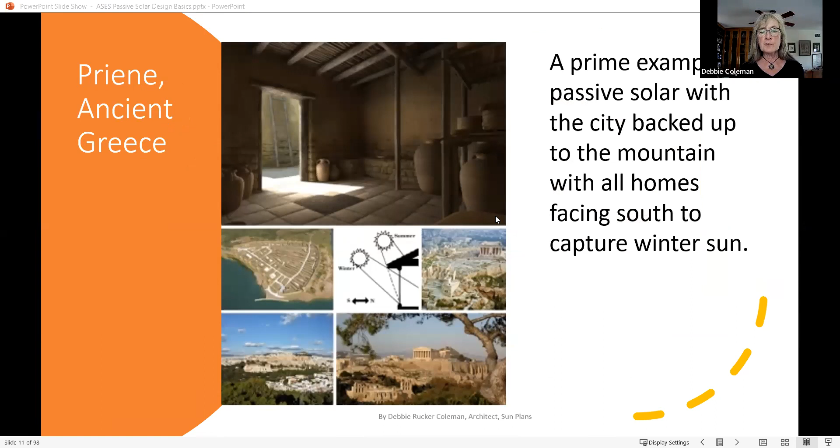Historically, passive solar is not new. The Native American Pueblo Indians built hundreds of structures in the south-facing cliffs of the Southwest US. In ancient Greece, there are examples with the cities backed up to the mountains with all the homes facing south to capture the winter sun.

In the United States, George Keck was the first architect to pioneer passive solar house design in 1933. He built a lot of houses with a lot of glass, but they overheated, so he played around with that. But he, in relationship with the developer Howard Sloan, built some passive solar homes and learned and experimented with those. The solar house movement started, I guess, in the 1940s, and Frank Lloyd Wright also started incorporating passive solar design around then.

So passive solar equals heating by the sun. There's no active moving parts. There doesn't have to be any moving parts for passive solar to work.

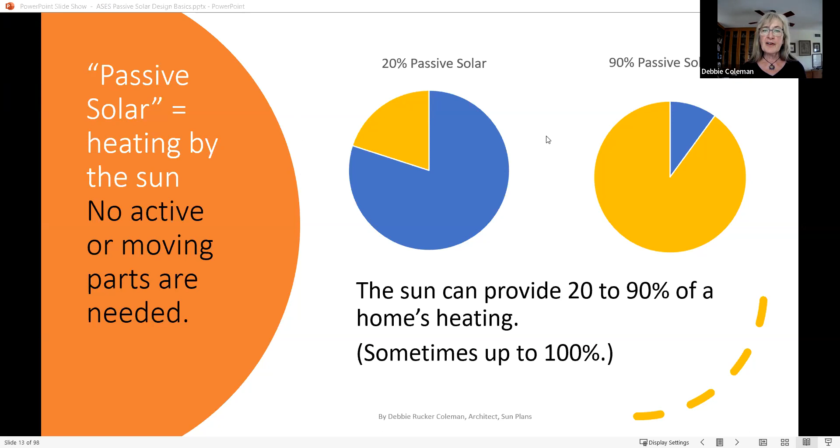It's really easy to design a home where 20% can be heated by the sun. It's a lot harder, but it can be done up to 90%. And there's some arguments that the sun can also provide 100%, which is not out of the question.

Traditionally in the United States, about half of our energy consumption is for heating and cooling. Obviously, that's going to vary a lot from different parts of the country. If you're in the north, the cooling is only a small part, the heating is a huge part. If you're in the south, it's reversed.

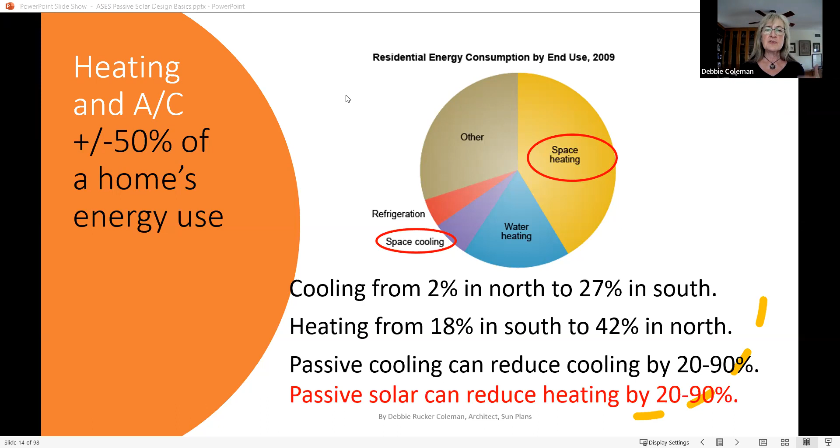In summary, the sun can provide between 20 to 90% of the heating, but then passive solar's sister, passive cooling - a lot of the strategies are the same. You can also passively cool a house 20 to 90%, which means you're cutting your air conditioning 20 to 90% with some of the compatible cooling strategies.

So overall, I think the goal is passive survivability. That term can be attributed to building science expert Alex Wilson, who defines it as maintaining livable conditions in the event of extended loss of power or interruptions in heating fuel.

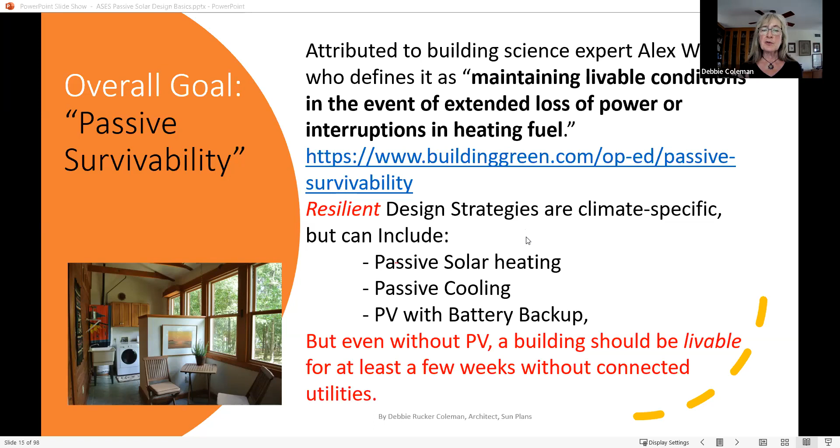You hear about the word resilient a lot - resilient design strategies. They're climate specific, but they can include passive solar heating, passive cooling, and PV with battery backup. But in my opinion, even without PV, a building, a home specifically, should be livable for at least a few weeks without connected utilities. And by connected, I mean even connected to your battery backup if that fails.

So we have the active solar, which is really easy to see. It's usually on the roof or on the ground, no doubt - that's what it is. Some people like it, some people don't. The passive features are a little more subtle. They have to do with orientation, the windows, and the overhangs. And they must be designed for initially - they're really hard to add on later.

Basically, you're arranging parts that are already in a house, just in a different configuration than you may be used to.

So passive solar, along with passive cooling, more insulation, less air leakage, and smaller HVAC designs - all of that combined means that we need less PV to power the home, to power its auxiliary backup heating, and just to condition the home in general.

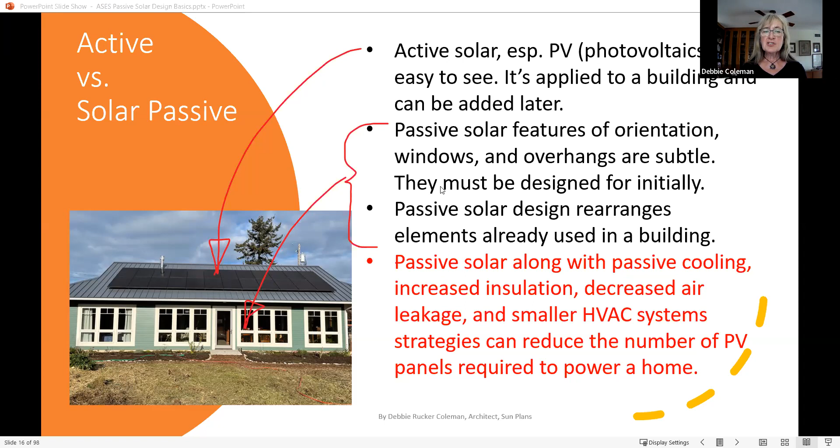There's a lot of attention given to all the energy we can get from the south-facing roof. But let's not forget that the wall also faces south. In the US, looking at this south-facing wall, you can see it receives almost the same amount of energy per square foot or per square meter as the roof does.

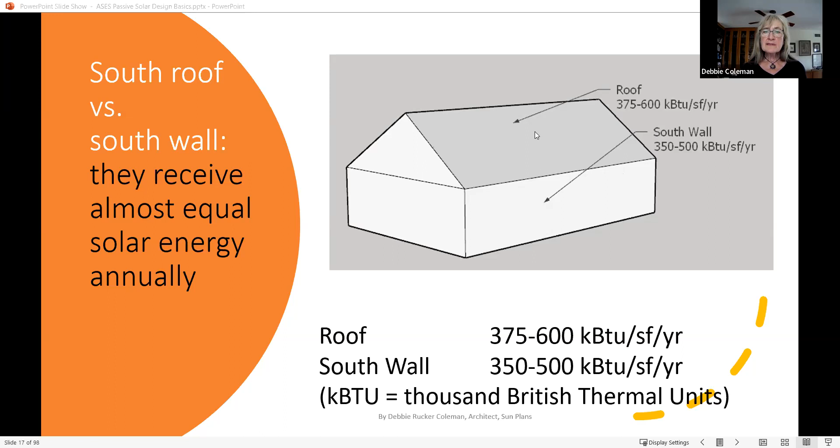So we have the active PV panels. I won't go over that a lot because of this ASES group, but obviously when you add the active solar to it, the house can be 100% powered by the sun, net zero energy, and all the different appliances that use the electricity.

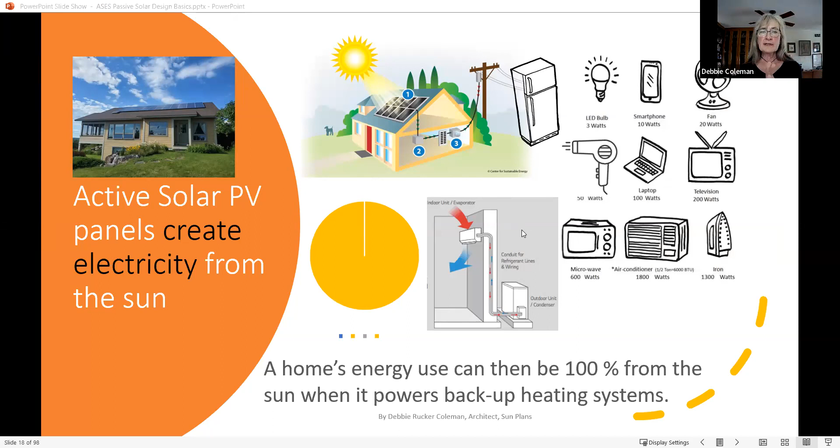From the passive heating standpoint, it's the mechanical system. Here's the mini split heat pump. That's what we're looking to power with the PV panels from the home conditioning standpoint.

Any extra solar that you generate from the PV can power the cars. Panels put on the roof can also heat water to go in the house, although now there's a trend more to use that PV to power your heat pump water heater. But anyway, water can be heated by the sun through panels on a roof.

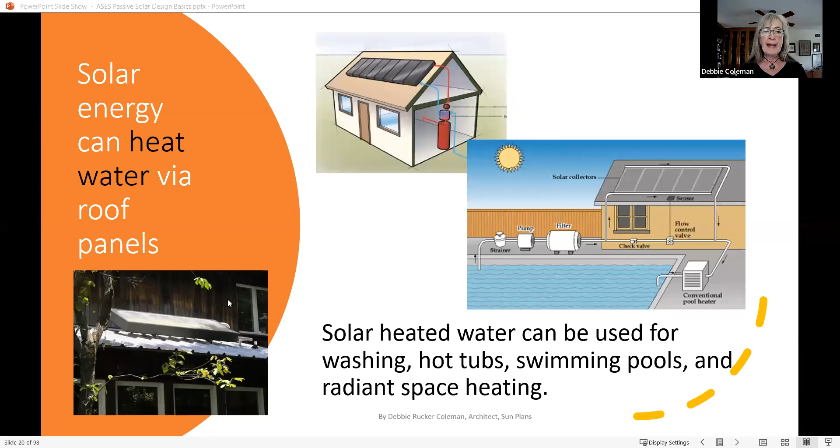This was a passive solar hot water heater system that I had.

And it can purify drinking water. So this simple system here, this is probably 2 feet by 3 feet, could probably distill about 1 gallon of water a day, which is enough for 2 people. So no need to buy bottled water.

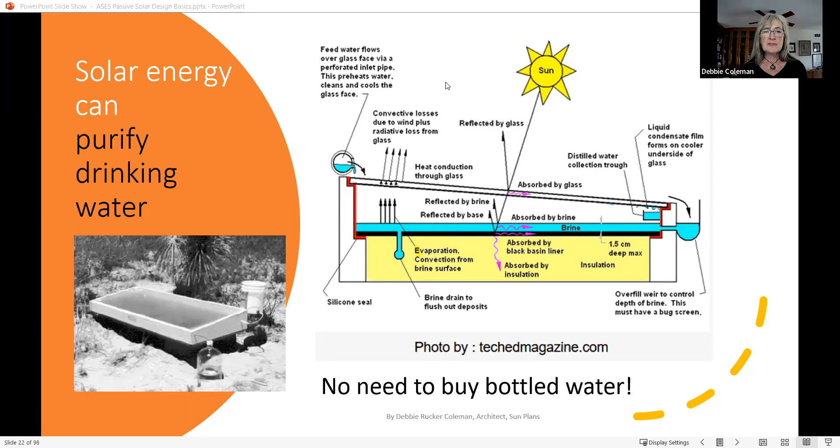And then one of my favorites is that solar energy can dry clothes. I like it because it's so basic. Less need to run the dryer.

Okay, so some of the prerequisites of passive solar house design - you don't want to just go putting the passive features on an energy inefficient building. So the same good design principles apply to a passive solar house that would to any other house. You want the well-insulated roof, walls, floors, window. You want a tight house. You want a right-sized heating and air conditioning system designed for the worst case scenario when the sun might not be out. That's a code requirement.

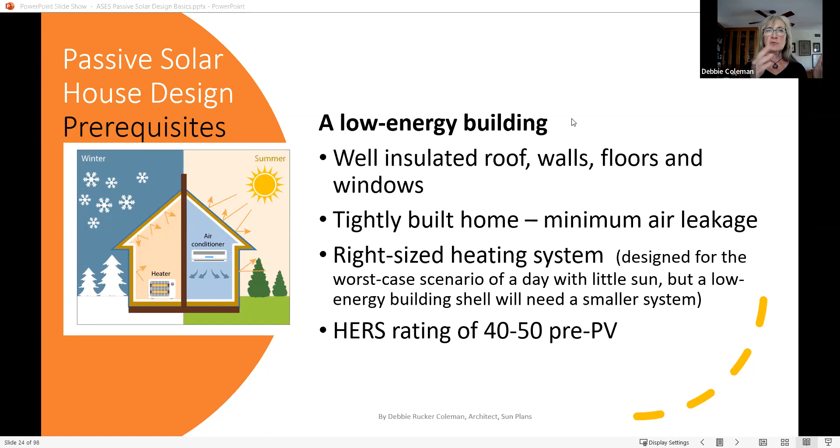And in terms of HERS rating, which you hear a lot about, I think aiming for around 40 is a really good goal. And then when you add your PV, it's easy to get it down to 0 to 10. If you're going to be charging your car, then you can go below 0.

Thicker insulation - not only does it keep in more heat, it keeps out more heat. So during the hot times of the year, that same insulation is working just in reverse. And beyond code minimum is a typical recommendation.

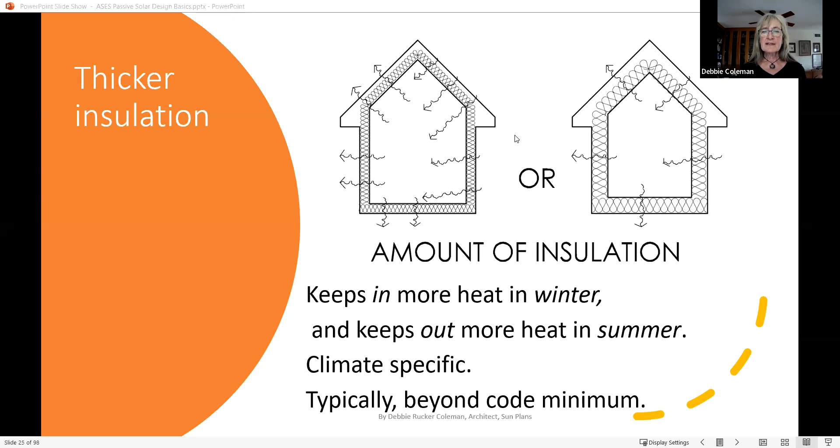A well-sealed envelope, whether it's caulking or house wraps or the combination - a well-sealed house will not only keep out the leaking hot air or cold air, it keeps out the humidity and it keeps out dust and bugs.

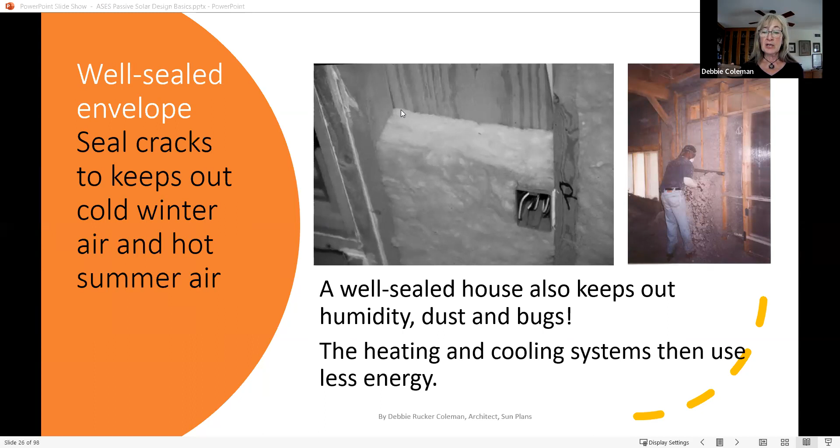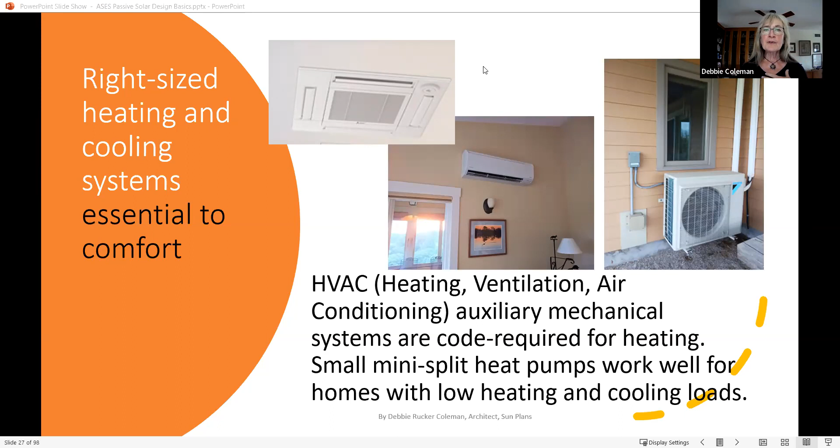The right sized heating and cooling system, that's essential to the comfort of your home. That is the backup to passive solar. There's going to be times of the year with these fixed systems and our huge climate change that we see, from extremes of 70 degrees from one week to the next, you can't design a fixed system to meet all needs. So you do rely on your heating and cooling backup system to help you through some of those times. But a right size one is important to the comfort inside the house.

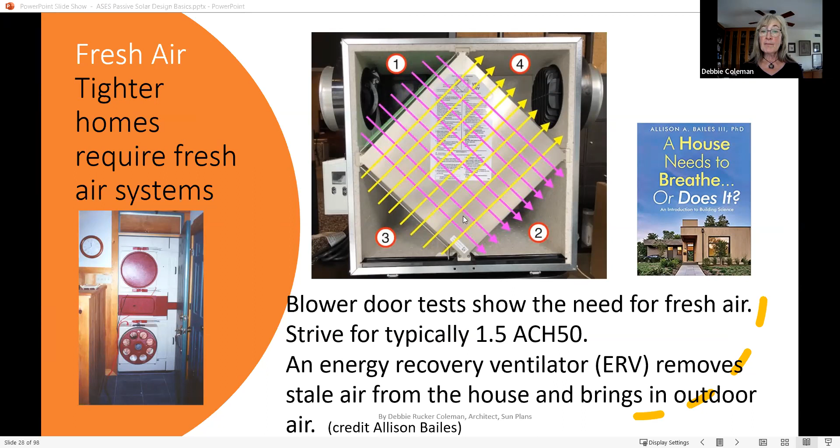You want to introduce fresh air. There's simple passive ways to do it. There's mechanical - the trend is more to add an energy recovery ventilator that takes in the fresh air and exchanges it with the heat and puts it into the house. Blower door testing to see how much of that fresh air you need is important.

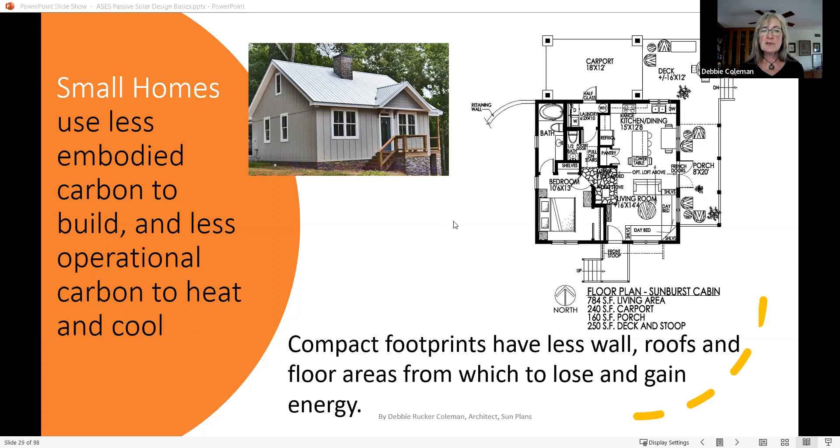And let's not forget the basics. Small homes use less embodied carbon energy to build in the first place, and they're less to operate, to heat and cool. So when people say, what's the most energy efficient home? I'll usually start with, well, the smallest that you can live in. And those compact shapes - there's less wall area, roof area, and floor area in which to lose or gain heat through. I really like a compact footprint for, say, a slightly bigger house that might have 3 bedrooms.

Rather than put those 2 bedrooms up, why not put them down in the south-facing daylight basement? You won't even be able to tell that you're in a basement. And when those homes, those spaces are nestled into the earth, there's a lot less heat loss and heat gain because the below grade temperatures are much more stable, at 40 to 76, than outdoor temperatures, which have a much wider temperature swing.

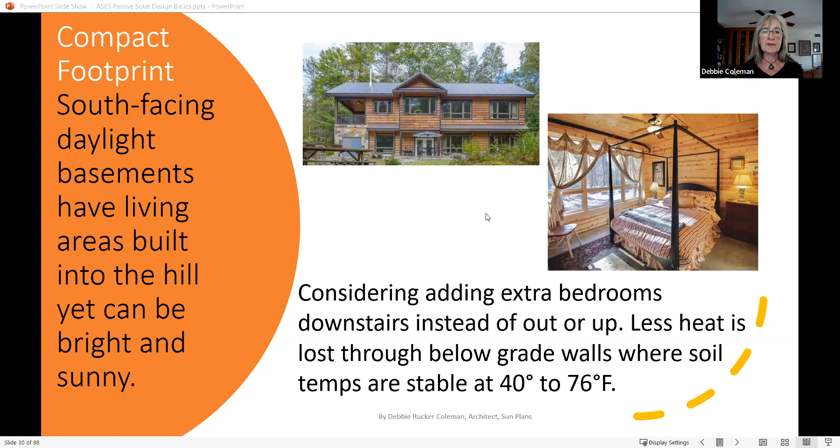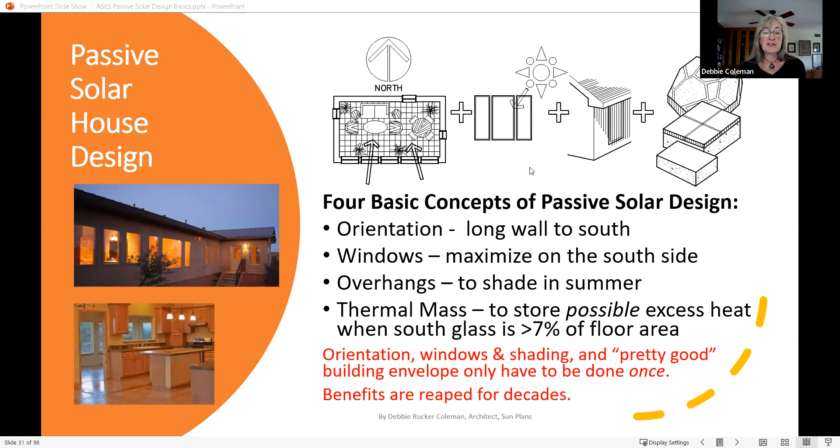So breaking down the 4 basics, we have orientation, the long wall facing south. We have windows, maximizing those on the south side. Overhangs to shade those south windows in summer. And then the thermal mass, that's to store possible excess heat if you have more than 7% of the floor area in south glass. So you only have to integrate these features one time in the design and construction, and then you'll take advantage of the benefits for years.

I mentioned the south facing glass. It's good to know where that is, especially because if it's not facing that way, you can cause some overheating in morning or afternoon. So true north and magnetic north are not the same, which I'm sure many of you know, but there's a huge variation.

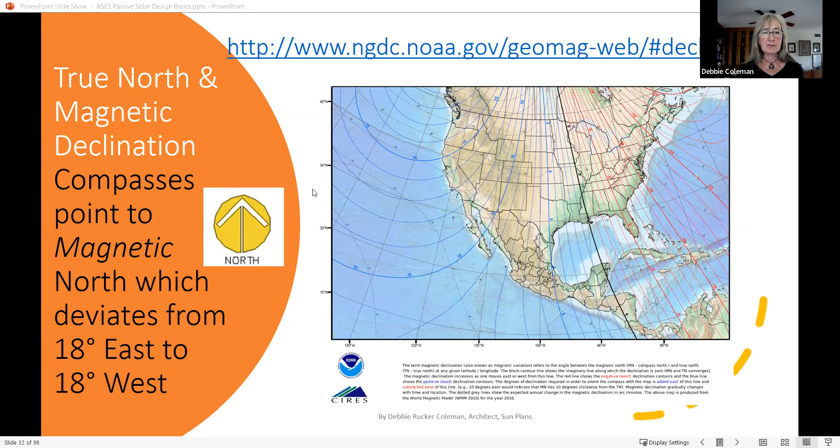If you look in the Pacific Northwest, it's going to deviate up to 18 degrees to the east. You move over here to the northeast, and it's going to deviate 18 degrees the other way. So that's 36 degrees of variation just in the United States alone. So you really need to get that right. Where is true north and therefore true south?

One of the reasons we need to do this is just to make sure that the windows are in the right place. The sun's movement - I apologize if this is just so basic, but it's really important.

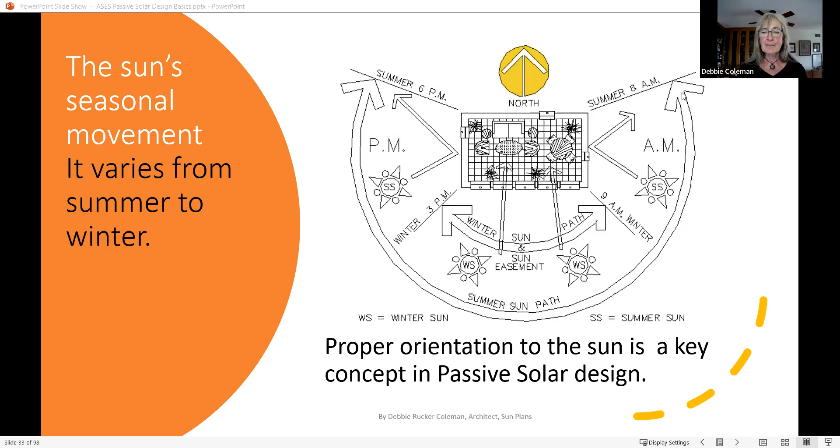So the sun does not move the same in summer as it does in winter. In summer, it has a great big arc and covers a lot of the building. In winter, it has this little bitty path. In summer, the sun is going to be almost overhead at noon.

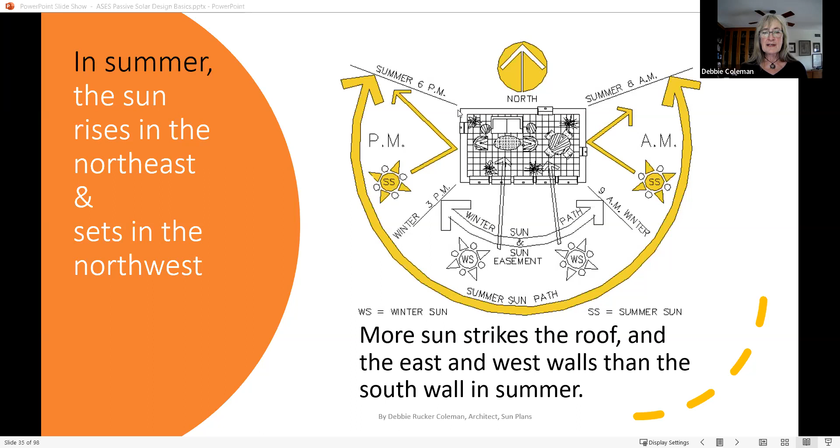And it's going to rise in the northeast. It's going to strike the east wall, then it's going to move around to the south, where because it's so high, it's really not hitting these south walls. And then it's going to set in the northwest, where during that afternoon, it's pounding on the west wall.

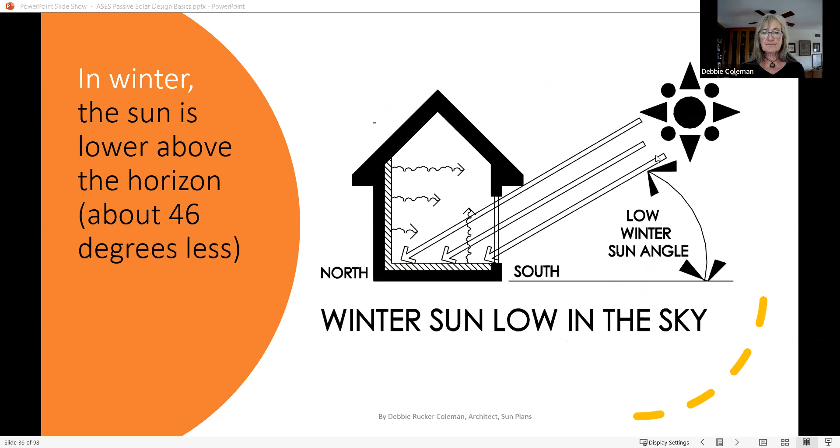In winter, it's going to be lower in the sky, about 46 degrees, as it moves from the 2 tropics of the earth. And it's not going to cover as much of the building. It's going to rise in the southeast most of the time, and it's going to be striking the south wall of the house.

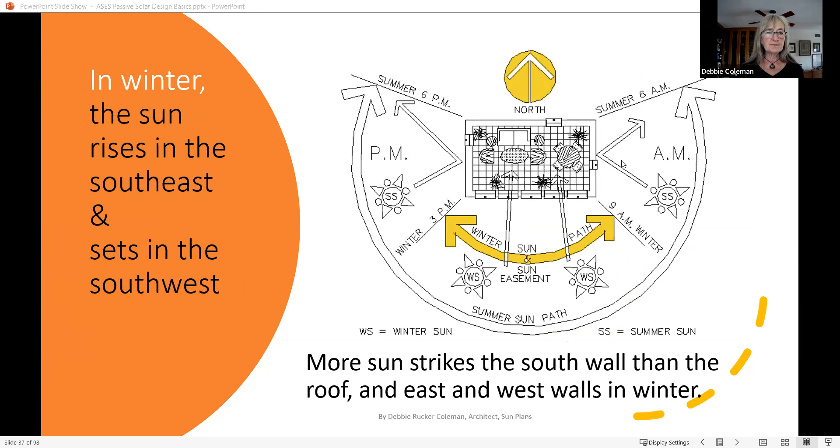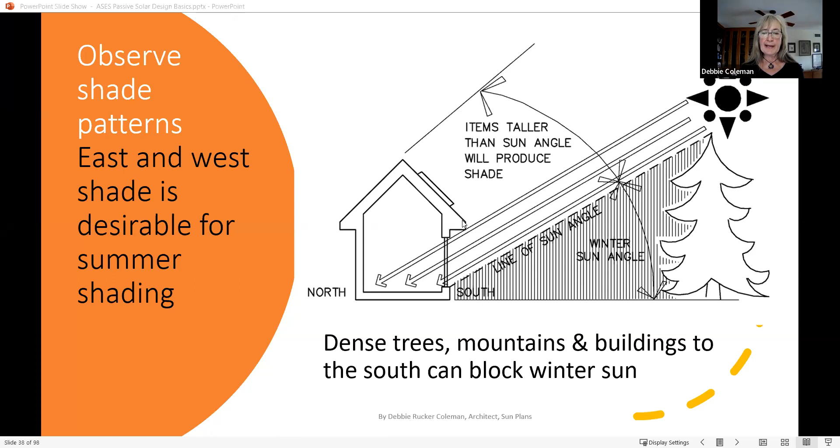Very little sun is going to hit the east and west. When you're out at your site before you build, you want to pay attention to shade patterns. You don't want to place the house in a shade pattern unless it's shade to the east and west. I really like this solar pathfinder tool that I think probably most PV installers have, where you can go out any time of day and any time of the year, and graph your shade patterns on the site. I think it's a really good tool to use when you're siting a house, especially if it's a small site and you're not sure how tall those trees are and what kind of shade they'll provide.

Building shape really affects the amount of south glass, so you want to think about that early on. Some building shapes allow for more south facing windows than others do.

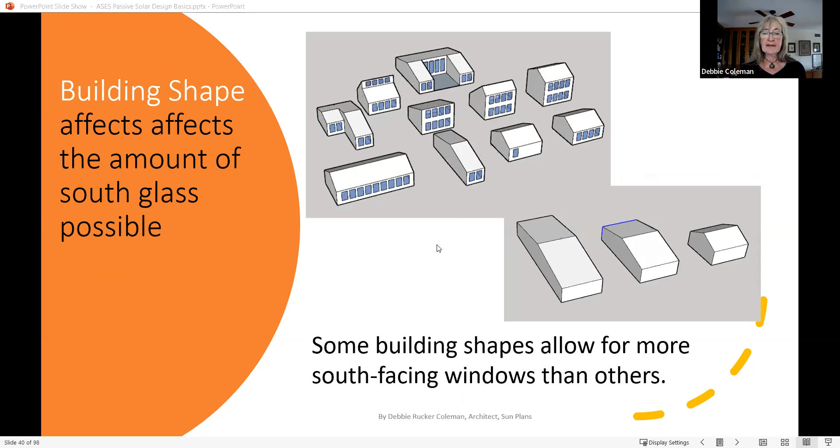So again, the south wall receives more hours of direct sunlight in winter than the east wall. Looking at the east wall, it might get 3 hours of morning sun in the winter, 3 hours of afternoon sun, and that's going to be sun that's low and not so strong to start with. But 6 hours in the middle of the day, on average, you will have passive solar gain. So that's kind of the basics of why most of the windows should be there.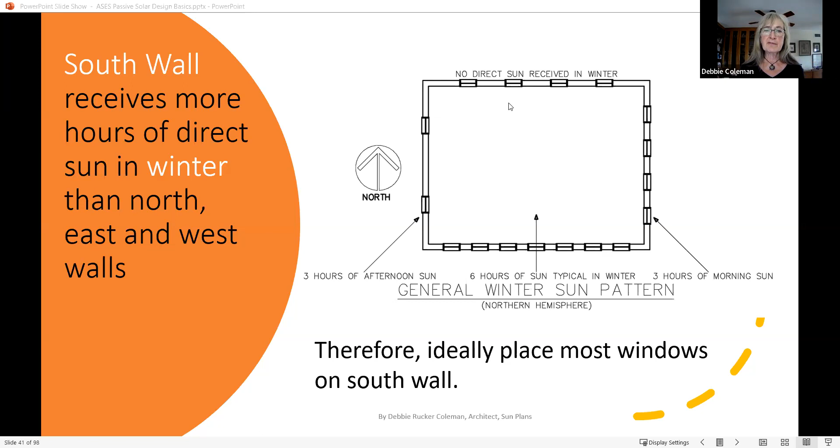You can put them on the north, and obviously I advocate for that in terms of views and just letting in the natural light, balancing light within a room, but there's not going to be any net solar gain coming from the north windows. So rules of thumb - how much for the different windows? These come out of some guidelines I'll reference earlier that came out of some NREL work. The west glass, a maximum of 2% of the floor area, since there's so much heat that comes in the afternoon.

North glass, I actually prefer a little bit less—I really like to right size and right place the windows based on the views, but a maximum of 4%. For east-facing glass, also 4%, though it's a little more forgiving, since sometimes we design houses to take advantage of that morning east gain, so there's a bit more flexibility with the amount of glass there.

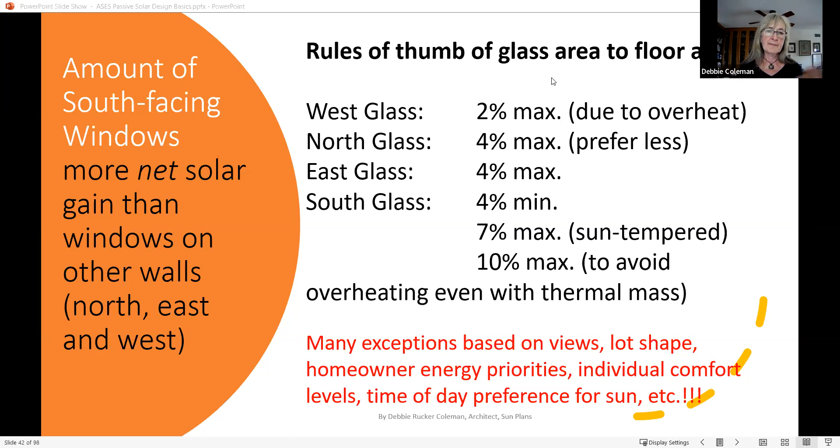For south glass, I recommend you strive for at least 4% as a bare minimum. 7% should be easy to do, and up to 10% can start to get challenging with your room layout, structural issues, and overheating. But there are all kinds of exceptions based on the views, the lot shape, homeowners' energy priorities, individual comfort, and their time-of-day preference for the sun—whether they're morning or afternoon people, etc.

Here's a south-facing window example—again, emphasizing this is for the northern hemisphere. If the south glass equals 4 to 7% of the floor area, that's often called sun tempering, and you'd need no additional thermal mass for that space to maintain reasonably comfortable temperatures. If you go above 7 up to 10%, you're going to start adding thermal mass. 8% is a really achievable number—a good balance that's a bit more without being excessive, doesn't cause structural issues, and usually isn't too much sun into a room.

Let's run through an example: this 30 by 40 foot house I drew has 7 windows that are 3 by 5 feet. A 3 by 5 window with a 2-inch frame would have 12.5 square feet of glass, since we're really talking about glass area, not window area. With 7 windows, that's about 87 square feet of south glass. Divide that by 1,200 square feet of floor area, and you get 7% of the floor area in south glass. When you look at that wall, you'd say, yeah, that looks like there's a lot of windows there.

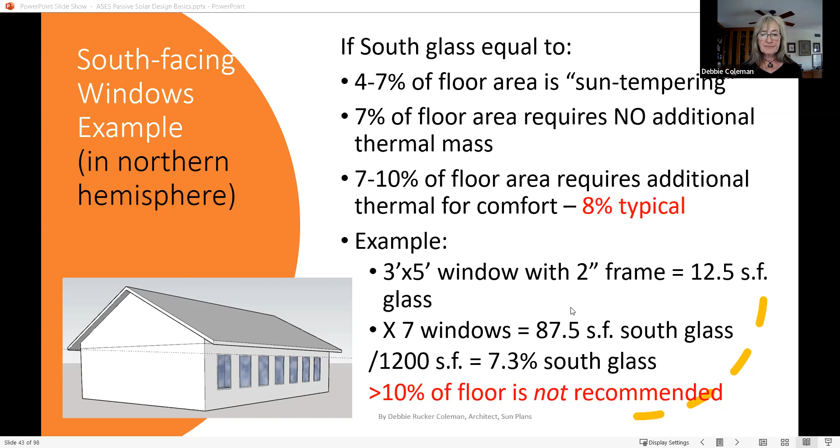And again, I've been talking about south glass versus south windows. An important window feature is the solar heat gain coefficient. A glass spec of, say, 0.68, which you see in a lot of passive solar friendly windows, will let in 68% of the sun's heat through the glass. However, that same glass, once put in a window frame, arrives at the job site with a solar heat gain coefficient sticker that's much lower. It's easy to think, oh my gosh, they messed up the window order—but the window is rated as a whole, meaning the average of the frame and the glass, so that number is going to be a lot lower. That's just the way the National Fenestration Rating Council rates windows.

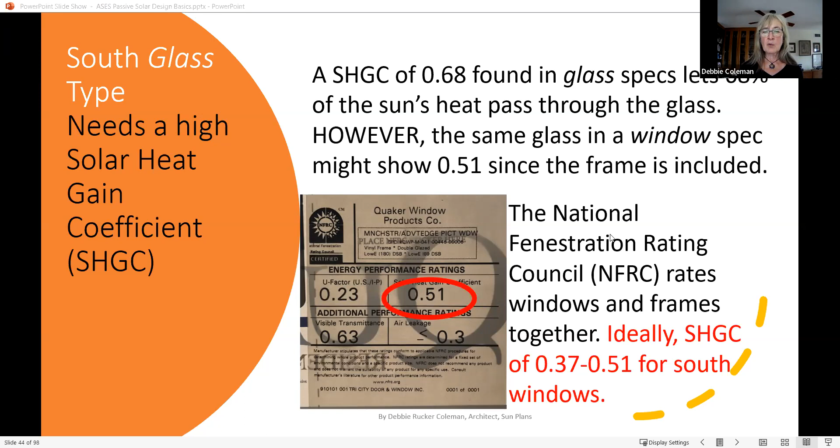So based on that number, I recommend you strive for a 0.37 minimum for your south-facing windows. And it's hard to find a number higher than 0.51 in a window overall.

Another feature of the glass is its insulating value, often referred to as a U-value—that's what you'll see on the sticker. The U-value is the inverse of the R-value, so 0.23 is R 4.3. Of course, a recommendation is to use better triple pane if your budget allows, or make it fit in your budget, because you only have a chance to do this right once, and hopefully you won't have to replace those windows for a really long time.

If you want a higher R-value, you can add insulated curtains to the inside to use on cold winter nights. Some cellular shades will let in light, so those can even be used on cloudy but still sunny days to let light into the house.

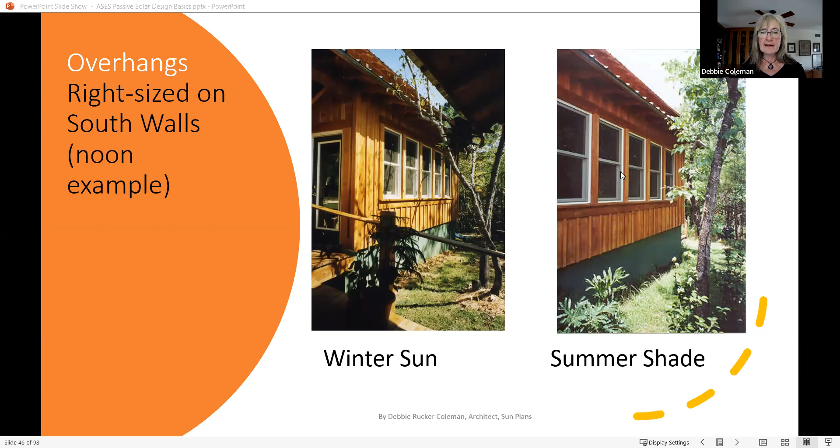Overhangs—we'll talk more about sizing later, but in summary, a right-sized one will have all windows in sun at noon in winter, and all in shade in summer. It's amazing how well a 2-foot overhang works as a general rule for a conventional house design, plus the 6 inches of gutter I like to recommend. Here's another example showing the shade line in winter, and then full shade on these windows with this attached overhang in summer.

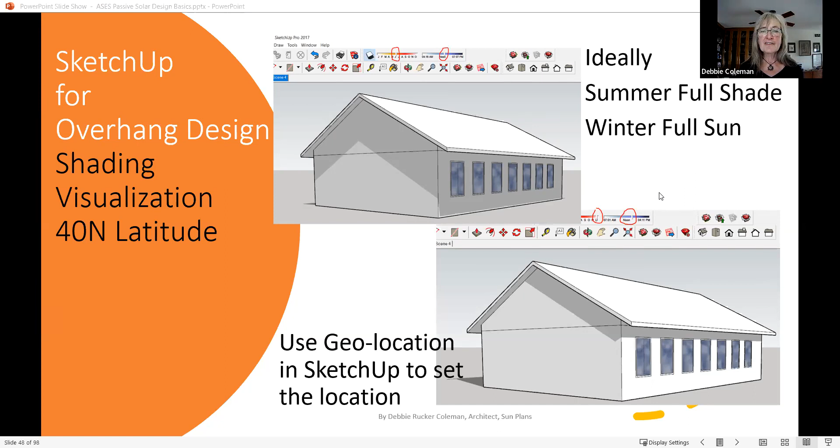SketchUp, for anybody that uses that free software, is really fun for overhang design. Here's an example I plugged in, 40 degrees north latitude. There's a setting under tools where you add the geolocation of where you are, and then the shade patterns you see will be the actual sun movements for that particular day. You can see as it moves from 9 a.m. to 3 p.m., the times when you really want the sun, watching it move across the building. You could do a little animation of it. I think it's something clients like to see.

Still talking about shading: east and west windows, porches. If you have to have a porch, that's a great place to put it. Obviously, if you put a porch on the south side, it's going to block your solar gain, but put the front porch, back porch, or any other kind of porch on the east and west, because it's going to shade those windows and shade the wall. If you had trees there, that would probably be the first choice for shading, but that's not always possible. Definitely don't cut your east and west trees down any more than you have to until you've lived in the house, and I use the same thinking with the south ones. When in doubt, you can always take a tree down later, but for a 30 or 40 foot tall tree, I'd rather err on the cautious side. If it's not going to hurt your house when you take it down, leave it up for a little while—it might not provide as much shade as you think it will.

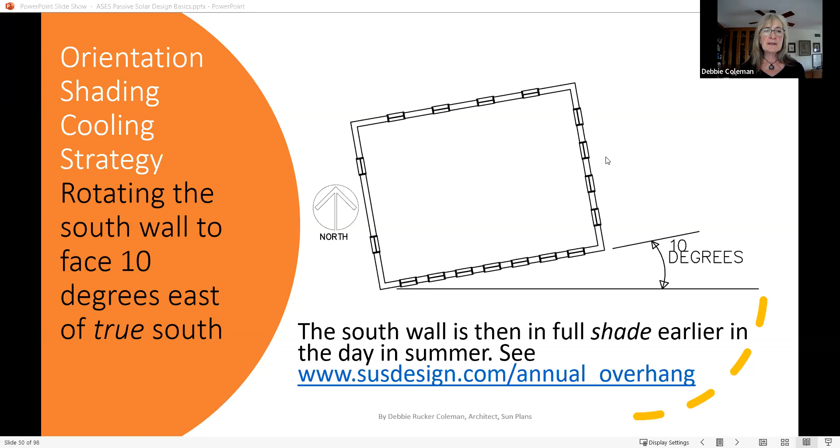This is one of my favorite shading strategies, and it has to do with the building's orientation in plan. It is amazing, and you can see this better when you model it in SketchUp, or any of the other more complex tools. When you orient it just 10 degrees to the east, you can see that south wall becomes shaded much earlier on a summer day than if it was facing due south. And the winter heating penalties are minimal—the calculations show maybe 3%. So I really like doing this in warmer climates, or if a client just has a preference for more morning sun.

Okay, so moving into thermal mass, let's talk about the materials and the quantity. For materials, I like to work with ones that are already going into a house, and I think the most common is a 4-inch concrete slab, whether it's the main house with one of the cold climate foundations, or whether it's a daylight basement. I really like concrete. Then you have brick, that's great for veneers on walls, stone, tile, sheetrock. All of those are going to provide thermal mass.

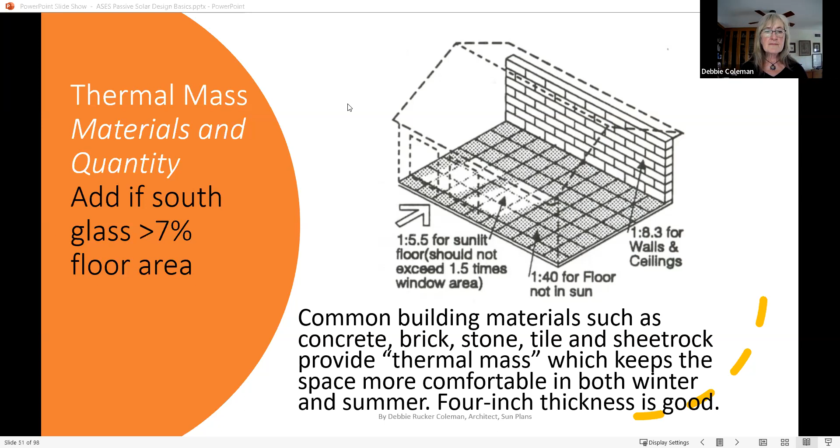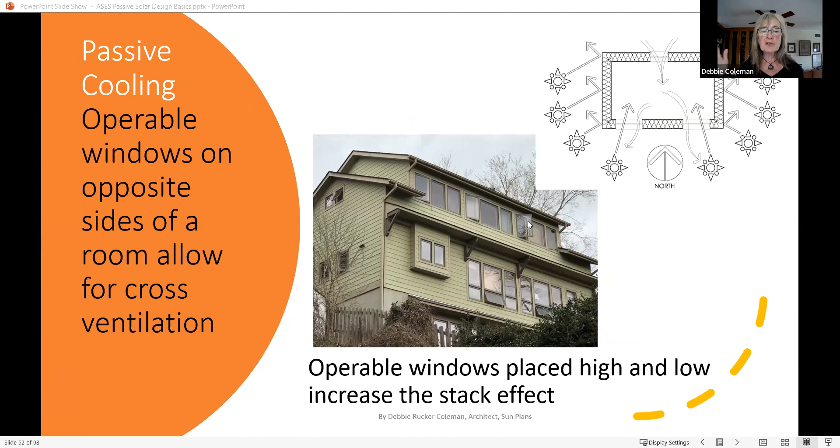For passive cooling, just going into that a little bit: operable windows on opposite sides of a room—it's amazing how that can help cool a space. And then there's high and low windows. A lot of times I like to design in an awning window down low and a casement window up above. With both of those open, you're creating a stack effect, getting vertical airflow that helps with cooling.

Not really passive, but a simple active air distribution. A lot of times I'll specify an inline fan with, say, a 6-inch duct that goes from the high part of a house, if it's more than one story, and ducts down to the basement to help circulate the air. It can be a small inline fan.

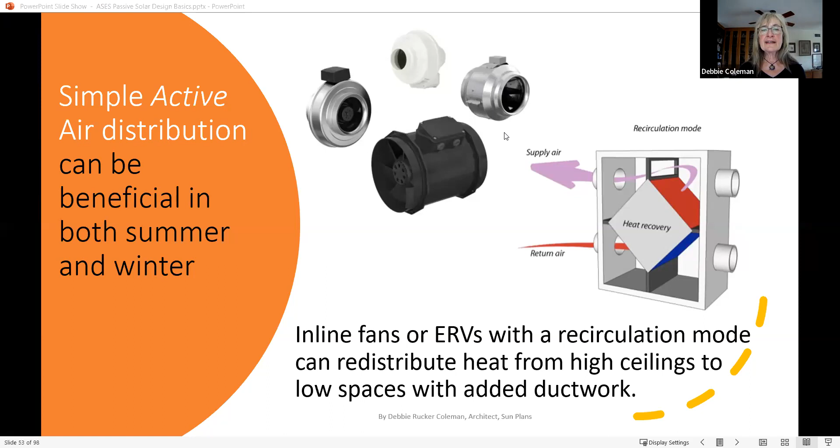Some of the ERVs and HRVs can be run in a recirculation mode, so when you're not bringing air in from the outside, you can be circulating what's already in the house. I like the idea of circulating it down to a mechanical room, say where there might be an air-to-air heat pump or air-to-water heat pump, so that it can also utilize that hot air.

So passive solar is really part of the holistic design process. Sometimes it's easy to think, oh, it's the whole thing, but when you're dealing with an owner, there's so many other needs that they have besides the energy and the passive solar features. There's their wish list, which could entail endless types of things.

There's the siting. Where does the road come in? How does the ground slope? What's their climate like? What's their ideal floor plan function? What construction materials does the builder like to work with? Structural issues, if they're in a high wind or high seismic area. Exterior design styles, what does the client ideally want? Mechanical systems - there's a lot of preferences for those, preconceived before they start talking with us or HVAC consultants.

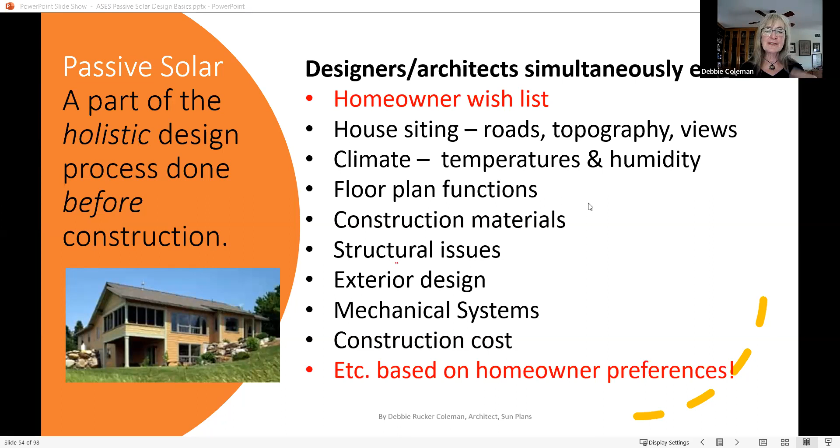And then there's the construction cost. Actually, I probably should have put that at the top. But anyway, I'm just saying all the different things you're going to evaluate - passive solar is just one more of them.

The climate specific design, I already mentioned that, but just more things to think about. You might design a house differently at one latitude, or at a different elevation above sea level for the same latitude. The wind speed and direction, especially in relation to passive cooling, or where not to put an outdoor living area. Are the occupants cold natured or hot natured? That's actually a fairly large one.

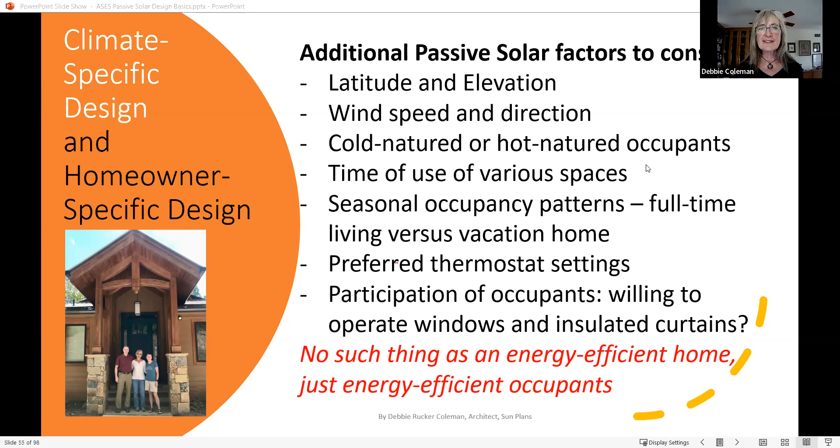Time of day of the different spaces - are they using certain rooms in the morning, the afternoon? Seasonal occupancies - if they're living in the house full time, and are there to be active people in a passive house, that's one thing. If it's just a vacation mode, then you might do some other strategies. The preferred thermostat settings, and are they willing to operate windows and curtains? Are the homeowners willing to be active people in this passive house? And I know you've all heard, there's no such thing as an energy efficient home, just energy efficient occupants.

Okay, well, I wish Christopher was here to do his part of the presentation, but he had other things that came up he had to do today. So I'm just going to go through some of his tools, which I've been using for about 20 years.

I think they are really cool, user-friendly design tools to help with passive solar, and more than passive solar, other aspects of solar energy. If you go to his website, there's a variety of design tools that he has, and I'm just going to go over two very briefly: the overhang analysis and the window heat gain. That's all we have time for today.

The inputs: you input your latitude, the time of day you want, the time of year you want to see the results, where the window faces, the window width, the window height, the overhang width, the overhang depth, and don't forget to include the gutter if that's going to be added, and the height above the window. I think that one's really important because it's so easy to mess that up. A lot of times that's hard to estimate until you get into the construction detailed drawings, but just pointing it out - the distance really between the top of the window and the bottom of the overhang, measured vertically.

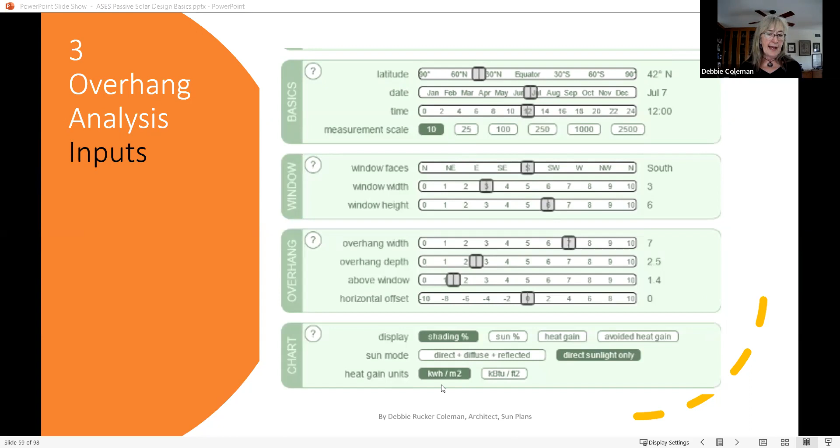And then in terms of outputs, you can choose: do you want to see the part that's shaded? Do you want to see how much sun? Do you want direct sunlight only? Do you want kilowatt hours per square meter? Do you want BTUs per square foot? But the output, I really like this.

Here's the times of day, here's the months of the year, and in this one we're showing the shading option. So you can see 100% in June, right in the middle of the day - that's usually a minimum. And then how far out the shading went to other parts would be climate preferences, homeowner preferences. But the bottom line is the tool makes it really easy to see where you're getting 100% shade and where you're getting 0% shade - in January, in this case, between 8 and 4.

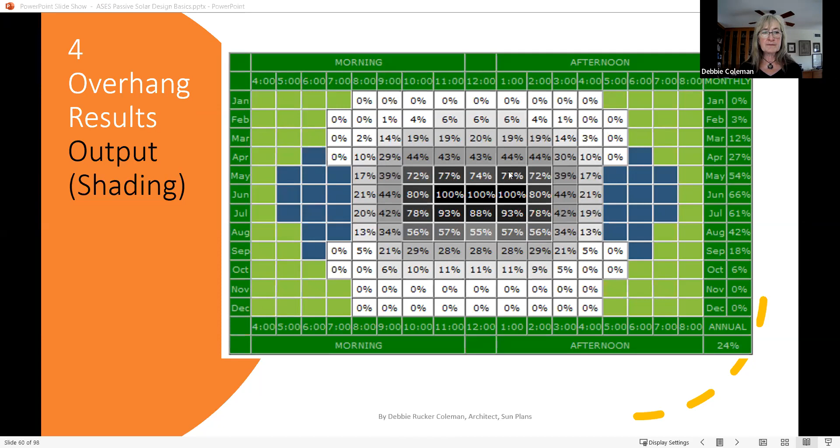You can look up your latitude by your zip code, or you can pick a city. I believe there are about 250 cities, and typically each state will have 3 to 6 to choose from. So I think it's okay to do that.

I don't think you need to get into the extra details. In terms of inputs, once you pick a city, you don't have to enter the percent of clear sky and sunshine every day, you can just forget that part. If you're picking the city first, this is already entered for you.

Same thing with ground surface. I might pick higher if I say, oh, where's snow, let's see how much extra we get from reflective snow. But typically, from a basic design standpoint, I'm leaving those untouched.

The window part, however, I think is a lot more important. There you can pick the type of window, which is going to equate to some of the solar heat gain coefficients, or you can enter the solar heat gain coefficient yourself.

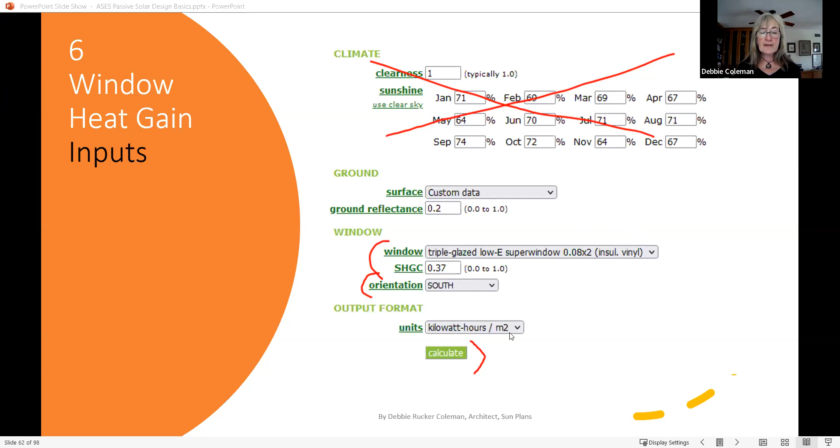Then after you click calculate, this is what you see. You can see the amount, and the lighter areas are showing higher amounts of passive solar gain during those months and that time of day.

Down here at the bottom, you can say, email me these inputs and outputs. Then from there, you can enter them into an Excel sheet and add your own other shading strategies and other things that you'd like to do.

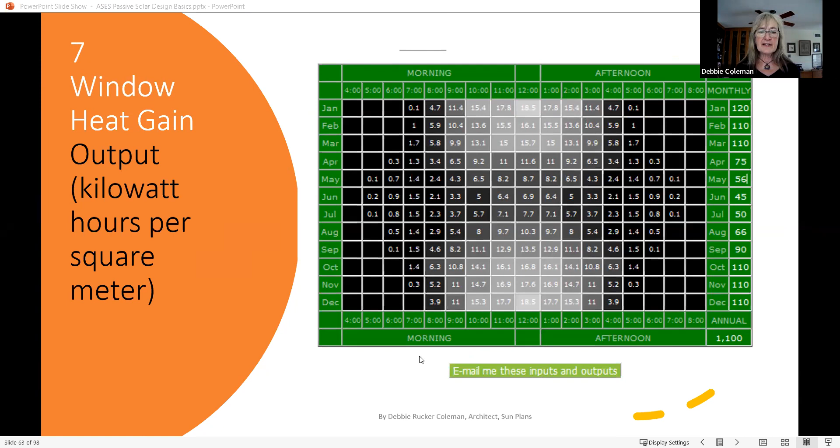This is my favorite, and it's actually part of the overhang, but this specific link, if you want to take a screenshot or make a note of that, it's actually a different version that's harder to find on his website.

How I will use this, just to show you, I'll draw - this is kind of at this construction drawing stage. I'm going back, double checking, and I'll look at the wall detail, and this is drawn to scale. So I will scale things right off the scale elements, right off the wall detail.

I like this part over here on the upper right, because your overhang depth, you enter that in, the spacing, the distance between the overhang and the top of the window, and then your window height.

And then usually I'm looking for direct sun only from an evaluation standpoint. I want to see the percent of sun maybe at this point rather than the percent of shade. So reverse from the other diagram that I showed, when it's in shade, you're going to see all black at 0.

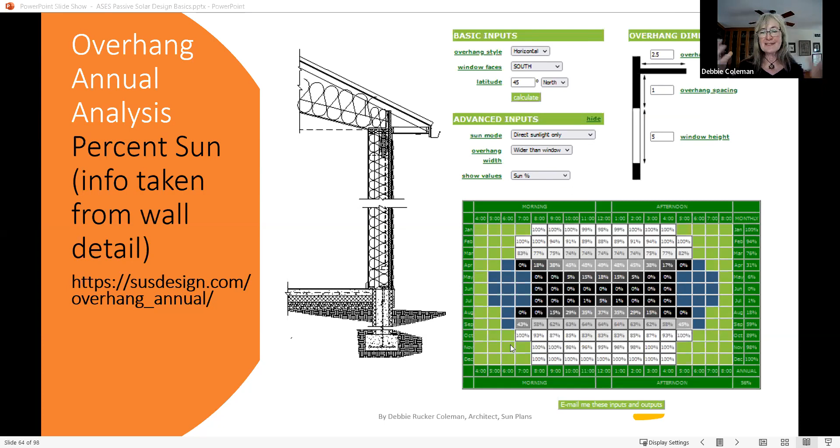There is a YouTube video where Christopher explains these tools himself, if you want to go and look at that. In talking with him this week, he did agree to do an ASES design tool webinar in the fall, so be on the lookout for that. He's going to be tweaking and updating some of his tools.

And the second tool I'll talk about using, maybe a tool that a lot of you have used, especially if you're doing PV design, and that's introducing PV Watts.

The first use of using PV Watts to quantify passive solar gain that I was aware of was from Marc Rosenbaum. He's a professional engineer, he's a net zero energy instructor, and it's when I took a class with him 6 or 7 years ago that I was first introduced to that.

In his course, which is a several week-long course, he showed how you could find out how much energy is in the passive solar sunshine. So I'm going to run through Mark's example rather quickly.

Here's the website if you haven't been to it. PV Watts is designed to calculate how much energy a solar electric array will generate, but we're using it to calculate the solar gain.

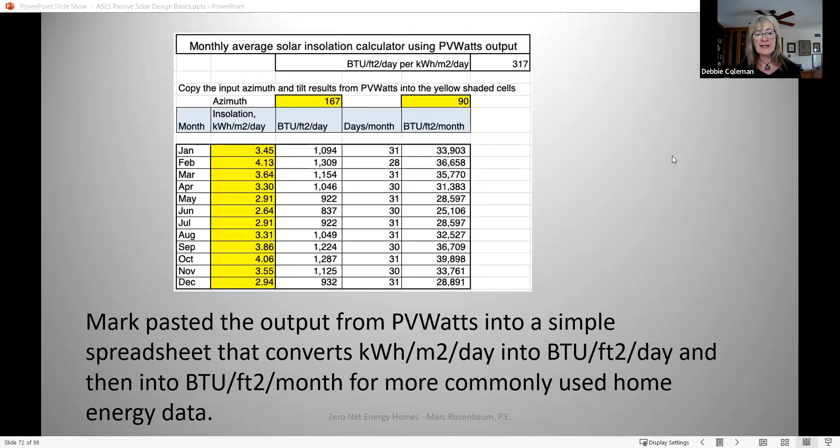Then click go, and you'll see the solar radiation you have per month. There's a box where you can export that data, and he pasted it into a simple spreadsheet that converts the kilowatt hours per square meter per day into BTUs per square foot per day, which is the more commonly used home energy data measurement.

Here you can see how he's graphed it. This is before he's added the shading information. As he points out here, that's the amount of solar gain that reaches the exterior of the glazing.

In his spreadsheet, he's entering the solar heat gain coefficient, any shading from overhangs, and any soiling on the windows. So bottom line, after he calculates all of that out, the heat pump with a coefficient of performance of 3, meaning you get 3 times energy out for every 1 in, would be providing 308 kilowatt hours in addition if the sun was not providing it.

And for his house, that's about 27% of his heating load.

Here's a poster example illustrating an example of using all of this. After I took his course, I created this poster and actually presented it at one of the ASES conferences. If anybody's interested in it, I'll be glad to send that to you just to see an example walkthrough.

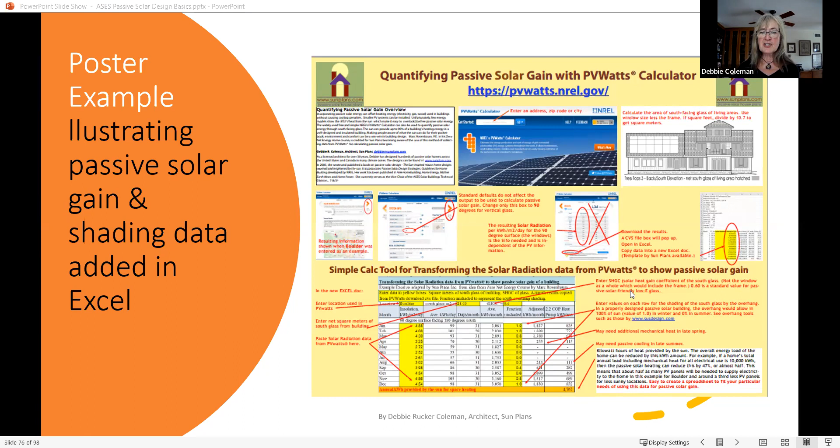As I walked through this one, it came out that on this particular passive solar house design, the sun provided about 50% of the passive solar energy. If we had thicker, more energy efficient walls, that number would immediately go up just by increasing the wall R values.

Okay, we don't have very much time left, so I'm just going to go through what I think is the inspiring part, some examples by other designers and architects.

Orlo Stitt, holistically green homes. Look for an ASES webinar later in the year where he's going to be talking about his subdivision and his home specifically. He's been designing and building passive solar homes for, I think, over 30 years.

He has a really cool subdivision. It was on the National Solar Tour. In his subdivision, the lots were arranged so every home could take advantage of south. The detailed covenants actually address passive and active solar.

There is a video, I'm not sure if this link will be active in the recorded session or not, but it's a great little 4-minute video about his project. If you visited the National Solar Tour, you might have seen that video.

The National Solar Tour, one of my favorite aspects of ASES, has some passive solar examples. This year we added a drop-down box where you could click and see which ones are passive solar. I definitely encourage all of you to attend the solar tour, and what we're really pushing for now is to get people to sign up, host your house virtually, host it in person, or do both.

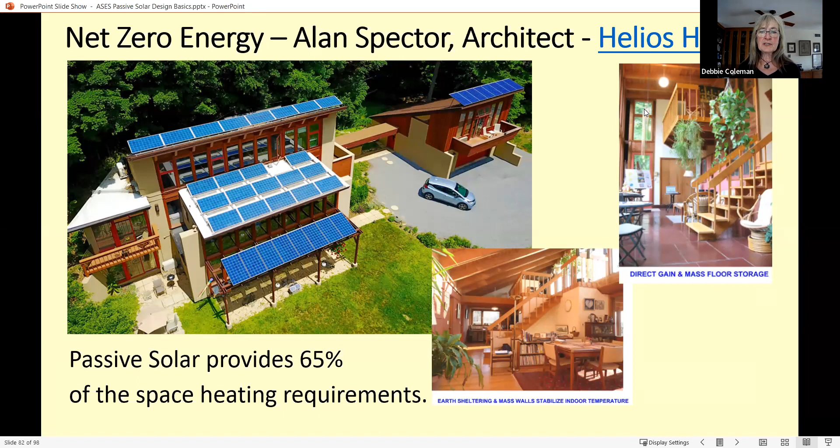Mark Chalom, he's also done webinars. He's an ASES member and has done some webinars. I think he did one last year on passive solar. He has some really cool Adobe homes.

These are some of Mark's inside spaces. His sunrooms, I think, are some of his favorite spaces, and he definitely designs his sunrooms for both plants and people. So I guess he feels like I do, that bringing the outdoors in makes for a better connection to nature.

Keith Sharp, some of you may know, designed and built the ambient house. Last year he did a presentation on it at Solar 2022, and I believe he'll have more results again this year. He was on the National Solar Tour last year, will be on it again I'm sure. His simulated performance shows 100% for both passive solar heating and nighttime ventilation cooling in climate zone 6 in Colorado, and his actual performance has been just shy of 100%. Keith could do an entire presentation on his house too, but I just wanted to illustrate it now. He doesn't have PV yet, but last year his whole house used about 4,300 kilowatt hours.

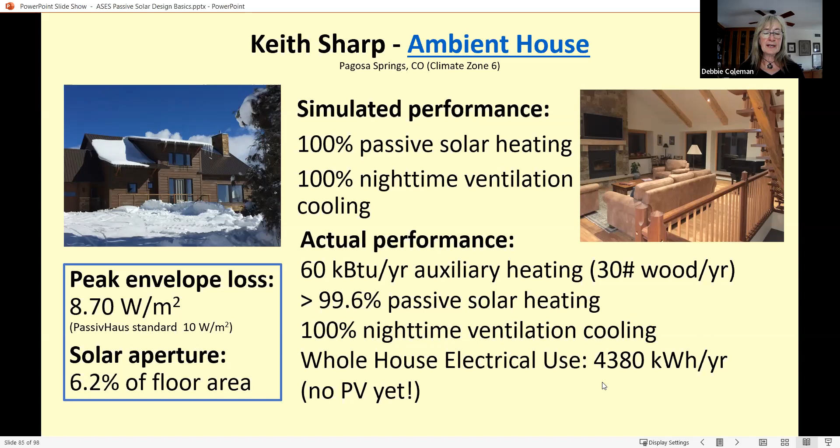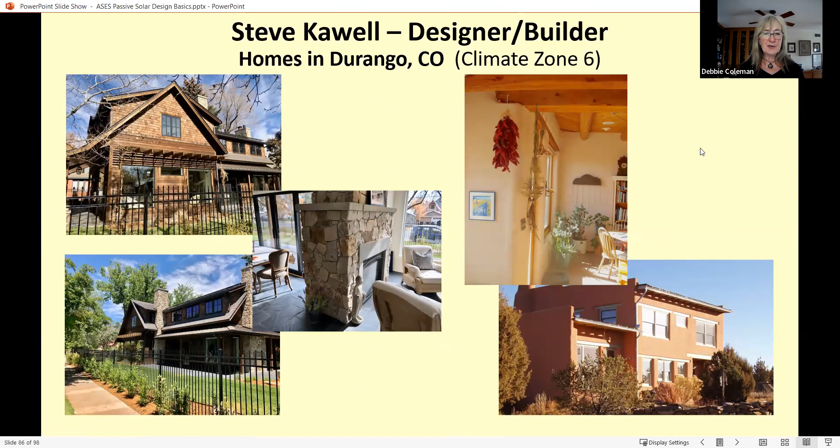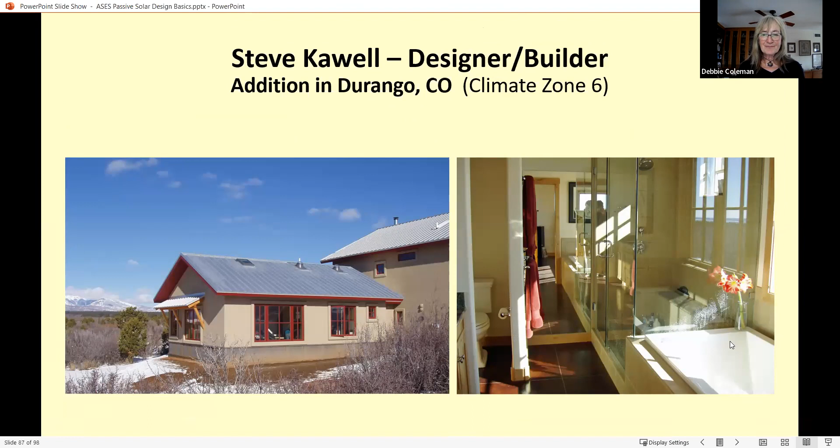Steve Kawell is a designer builder, also in Colorado, climate zone 6. He just sent these examples showing the south side full sun, full shade, some excellent thermal mass examples, some interior and exterior of adobe homes. Here's an addition that he did, and I thought this was rather clever. It shows you can put those south windows in a bathroom. It doesn't have to always go into the main living area.

New Mexico adobe renovation. This is Andrew Stone. He was on the ASES board of directors last year, and I was able to tour his home. It was a fairly conventional home he had renovated, but he added this wonderful two-story solar addition in the back, done in a very clever manner.

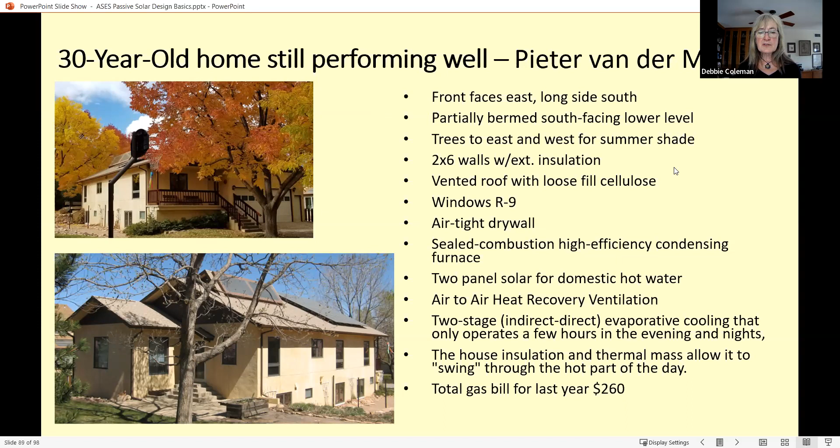Here's a 30-year-old home by Pieter, and I won't read through all the things he did, but basically his 30-year-old home is still performing really well using the same basics that I've covered. Of course now insulation levels have increased that are typically done, but here's a 30-year-old house that's still doing well. His total gas bill last year was $260.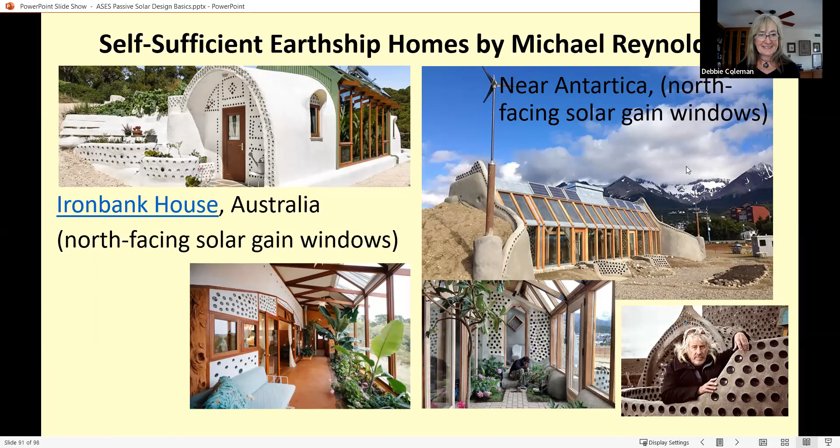I really like the Self-Sufficient Earthship Homes by Michael Reynolds. They're very inspiring. This one here near Antarctica shows that, yes, passive solar does work. Really nice interiors, especially in the sunroom area. Tiny Earthship home - I thought this one was really cool. I haven't been there, I would love to visit. 560 square feet they built for under $10,000. Has some nice characteristics to it.

This was actually a clip from a previous ASES webinar that Tim did on the Good Energy Haus. So if you want to go back to ASES and look, there's a whole webinar where he talks about his house built to passive house standards. The passive solar is providing 60% of the winter heating needs with just one small mini split heat pump.